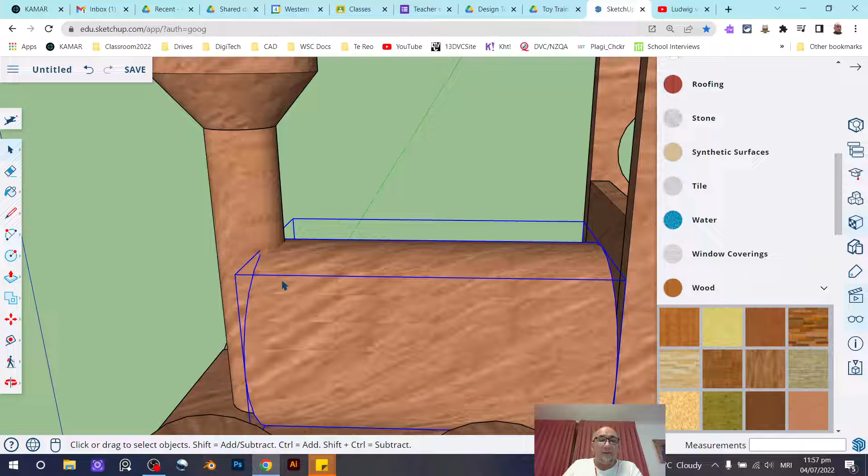So if you're using SketchUp for Schools, this is a feature that we have. It's these tools here, the solid tools. So how do you use them? So what we're going to do is this. I'm going to do it once first, and you'll notice that there's a big problem with the technique, but I'll

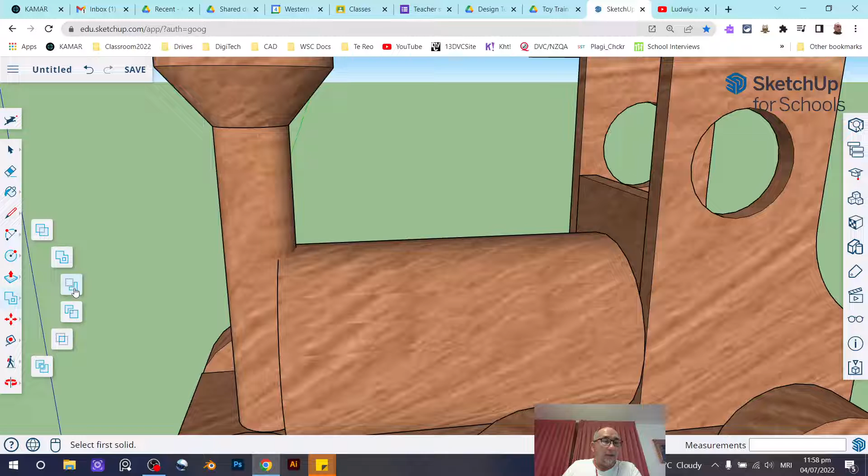show you. So we're going to use the subtract tool, and I'm going to subtract this solid group from this solid group, right? And so this is what it does, but you'll notice that there's a problem, which is, we've lost our boiler, so that's not very good. So we'll undo that. So now let's come back.

So what we're going to do is we need an extra copy of this boiler. So we're going to right click, and we're going to go to the copy tool here, copy, and then we're going to paste it in place. So when we do that, there's now two copies of this, so I can use one of them to subtract from this chimney. So I've got it selected, go to subtract, and then this is what we want to subtract

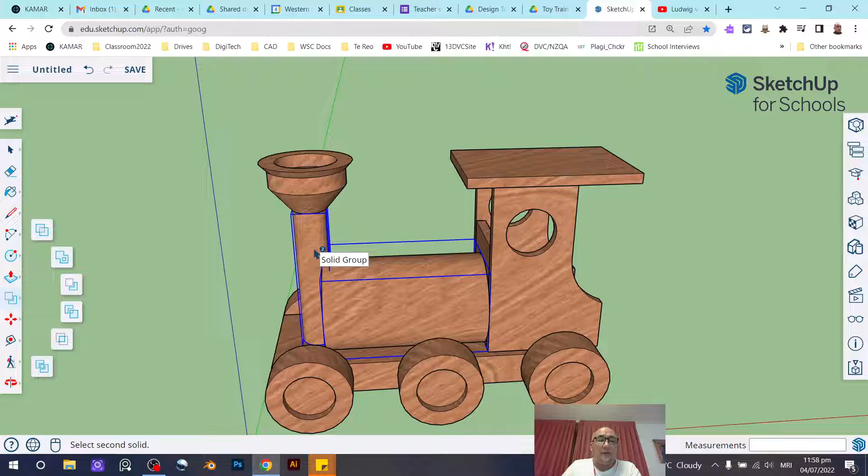from. There we go. Right, and so now if I hide this, you can see that this has made space for itself. There's a bit of a problem down here, but hey, no big deal. It doesn't have to be perfect. We'll go back to display, and we'll just unhide the last thing.

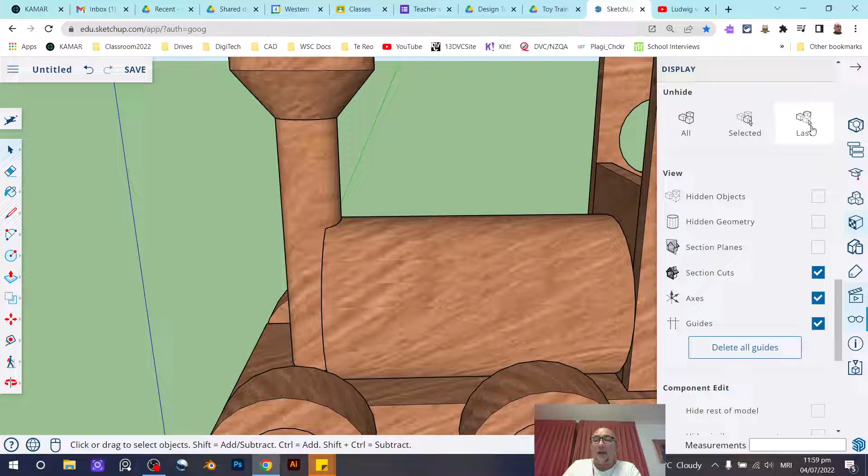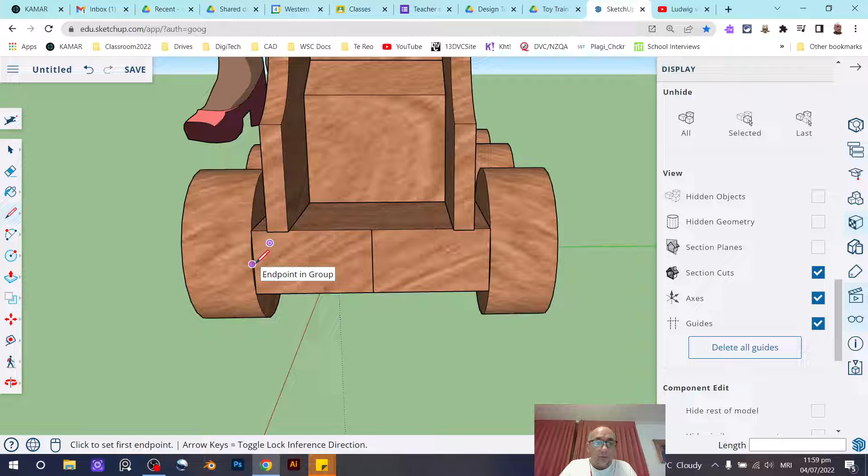Right, so now let's go over here and make our hook so that we can attach some other things to it. So we'll start by drawing some lines on here. That's the midpoint, so we'll just draw a line down here, and we want it to be from the center. So let's go over to here. Let's see, that's not where we want. There's the midpoint there. Go straight across here to there. Right, so this is where we want to draw our circle.

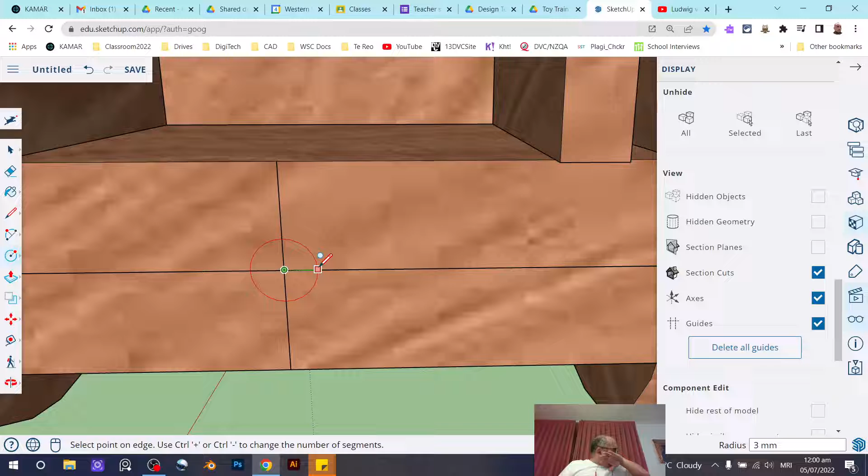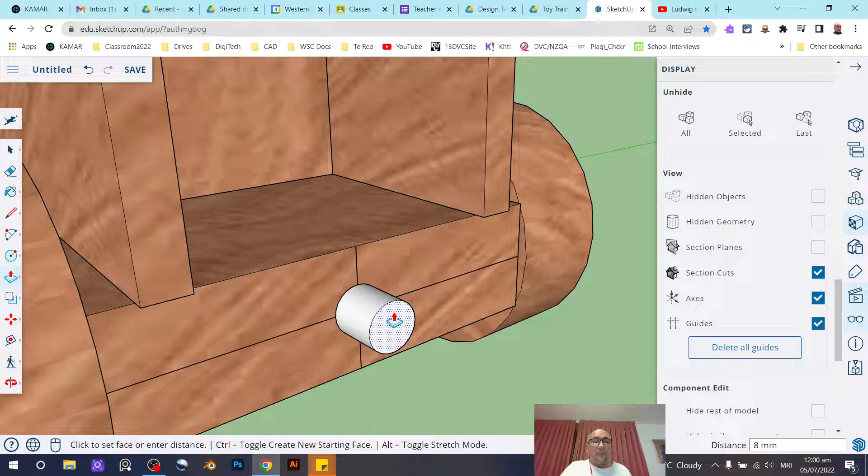So something like this. How big a radius? Let's make a 3 mm radius. Excuse me. So there we go. And we'll pull this out. Oops. Push-pull tool. See how it's got quadrants? We don't really want that. So let's get rid of the pieces we don't want. Delete these. Like that. And now we can use the push-pull tool to pull that out. Let's say 8 mm we're pulling it out by.

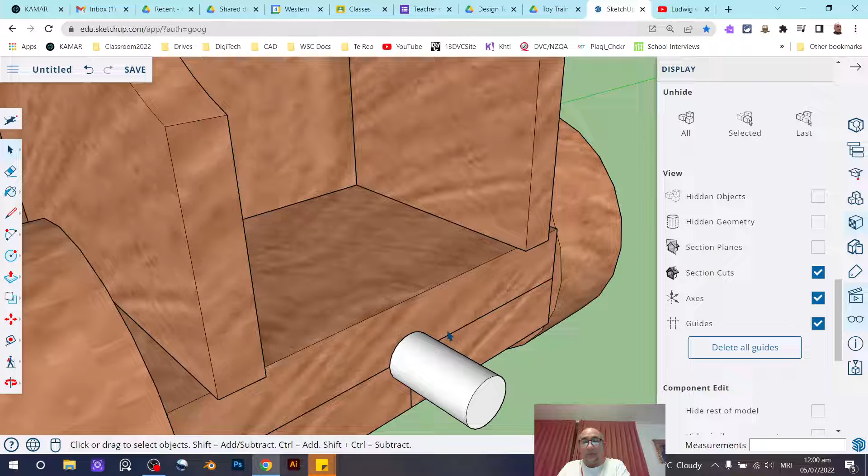So there we go. So now what I want to do is make a little ring here, a little donut. This is a very advanced technique, so if you're like, I'm not up for that, don't worry about it. You can just leave this part. You don't really need to do it. But if you want to have a go at it, I think it's really a valuable kind of idea to have. So let's start by drawing the circle that the path is.

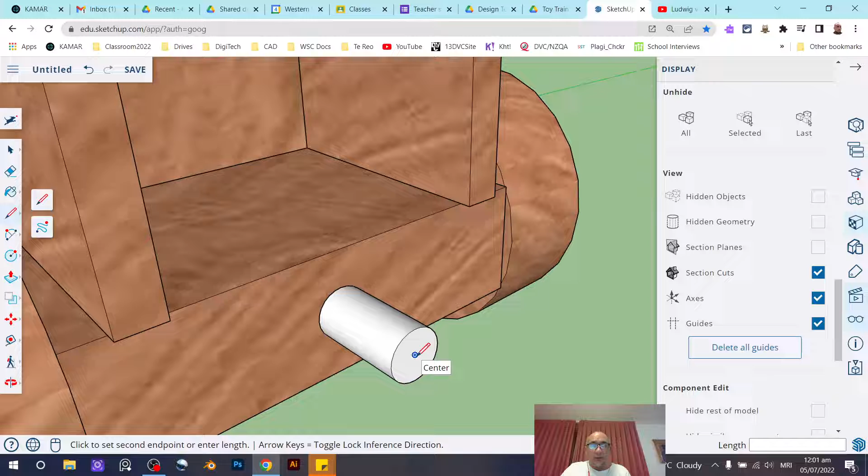We're going to basically draw the wireframe of this circle. So I'm going to go to the end point here. So find the center here. I'm just going to draw a line out here, right? So the circle that we're going to draw, we know that it's going to be on this line here. We're going to go to our top view. There we go, right? And there we go.

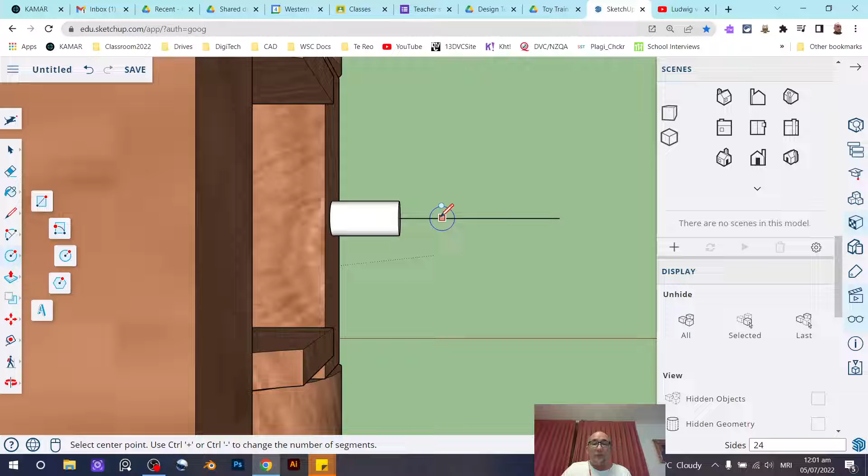And so now we're going to draw a circle. Now, it doesn't have to be perfectly the right shape. What matters is where the center of it is. I think it should be probably here, and I'm just going to draw it there, right? Now I'm going to go to my other view. Sorry about that. Let's go back.